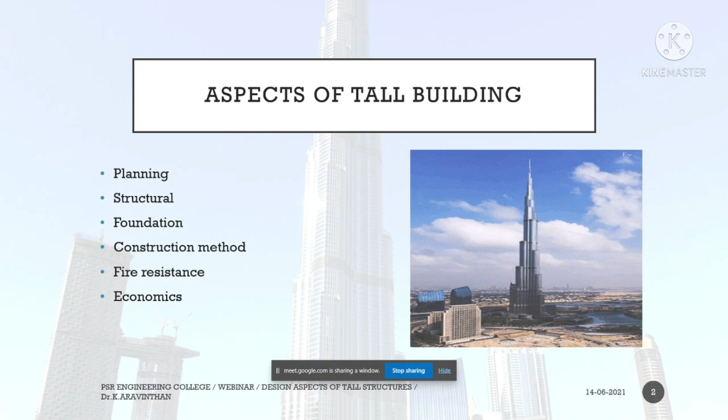The last thing is economics. Yes, it doesn't come under the part of civil engineering, it comes to the client side. And next, what is a tall building?

There is no uniform definition for tall buildings throughout the world. Tallness is a relative thing. In South India, structures around 15 to 20 stories are called tall structures because infrastructure development is increasing year by year. In other countries, buildings up to 100 stories are common, with 20 to 30 such structures, so the definition of a tall structure differs for different countries, and we have to follow their norms. So there is no uniform definition for a tall building; it is a relative matter.

It depends on the person and community, and the circumstance and consequence of perception of how you perceive a tall building. So it is a vague word which cannot be fit into a civil engineering term.

In civil engineering terms, a low rise building is 1 to 3 floors, lesser than 9 meters height. A multi-storied building is 4 to 6 floors, around 9 to 21 meters height. A middle rise building is 7 to 9 floors, a small high rise building is 10 to 16 floors, and a high rise building is 17 to 40 floors. These are the levels before a tall building. The highest high rise building is called ultra high rise building, which is more than 40 stories.

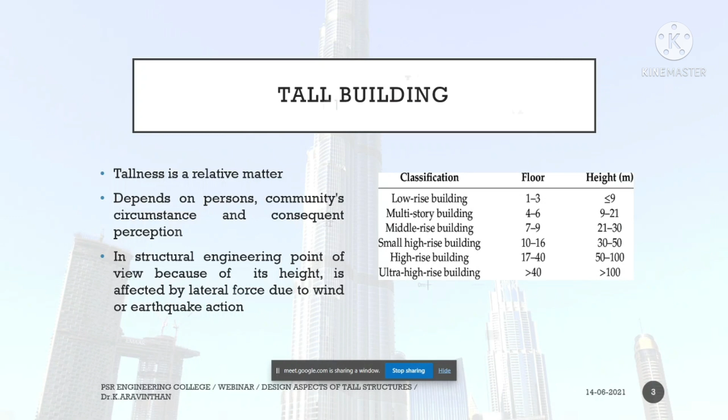These are the preliminary classifications up to a height of 100 meters. From the structural engineering point of view, because of its height, a tall structure is affected by lateral force due to wind or earthquake action. So if the construction is largely affected by these two phenomena, and if the lateral force is comparatively higher than the vertical force, then it can be said to be a tall structure.

There is the Council on Tall Buildings and Urban Habitat, an international association and organization particular to growing urbanization and tall structures. Throughout the world there are such associations, and in India we have CTBUH, which has several classifications and is interested in creating and developing skyscrapers. A building taller than 200 meters is called a skyscraper, and a super tall skyscraper is taller than 300 meters. A mega tall building is taller than 600 meters - Burj Khalifa is the only structure beyond the 600 meter level.

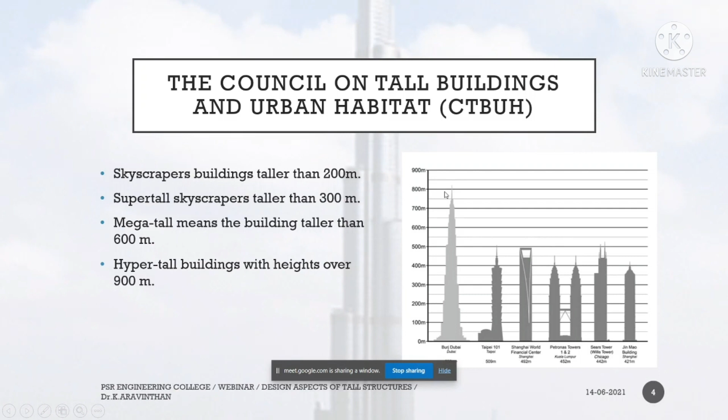You can see the picture here, it is nearly... Excuse me sir, slides are not moving, sir. See, is it visible now? Yes sir, now it's moving. Yes sir, okay.

So you can see around 800 meters of height, and the rest of the structures - the Taipei 101 tower is around 509 meters, and many hyper tall buildings under construction are around 900 meters. Still only one structure, having around 600 meters, is a mega tall structure.

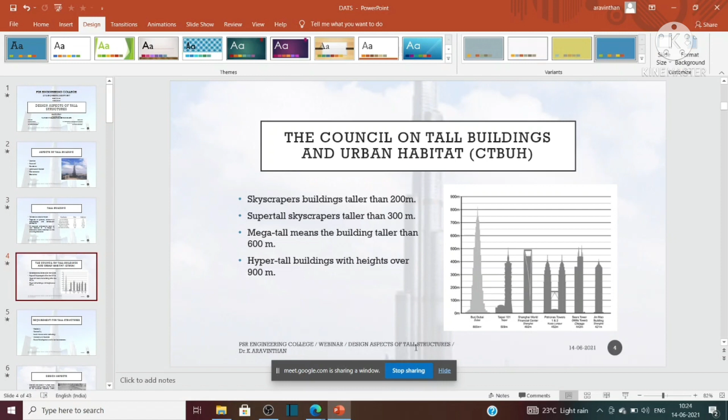These are the classifications under this. Sir, make it full screen please. Make it full screen, yeah. Is it visible now? No, sir, not visible. So I am sharing my entire screen, please confirm from that end so that it is visible or not. Yes yes sir, now it is visible. Okay, fine, thank you, yes okay sir.

The requirement for a tall structure - what is the demand? Why do you need a tall structure? Is there any demand for that? Is there any force behind that? Yes, if certain conditions are met below, you can go for a tall structure.

First one is feasibility, whether the tall structure is feasible for a government or for a country. A tall structure cannot be built by a common person, and it is for the common people, for everyone. The construction is not only for a single person. If a tall structure cannot be occupied by a single person, it should be a community oriented structure, and it will be a landmark.

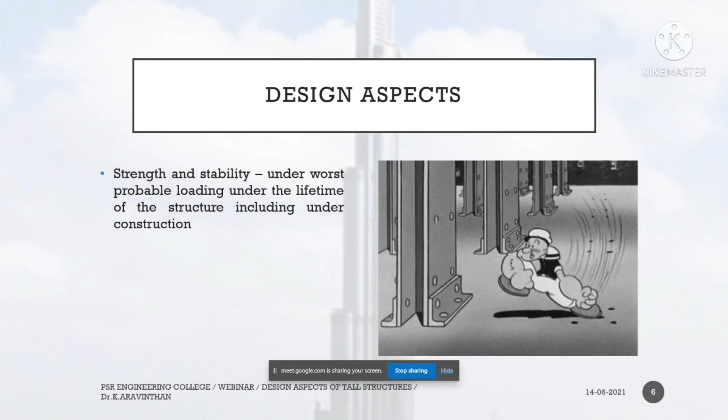From an academic perspective, we know the concept of how rigid frame structures are designed, how framed structures are designed - beam, column, foundation, slab, everything. We know the calculation of reinforcement, and we know how to construct and deal with all these things.

So what about the design aspect of tall structures, which are higher than 400 meters, 500 meters? Are the techniques we deal with in our subject enough, or is there any new technique or new principal phenomenon? This is the core of the subject today. Let us discuss this.

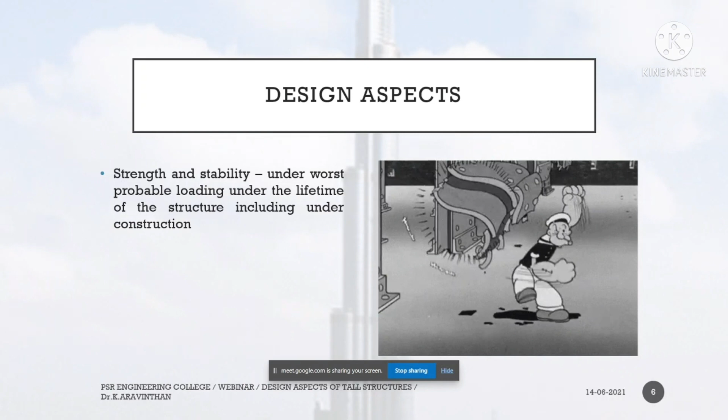The first aspect of design is strength and stability. You can see a picture here - I hope everyone remembers this Popeye cartoon, and if he has his spinach, he will be able to make anything and everything. You can see a steel structure being bent as simple as that. Only in cartoons can you see this.

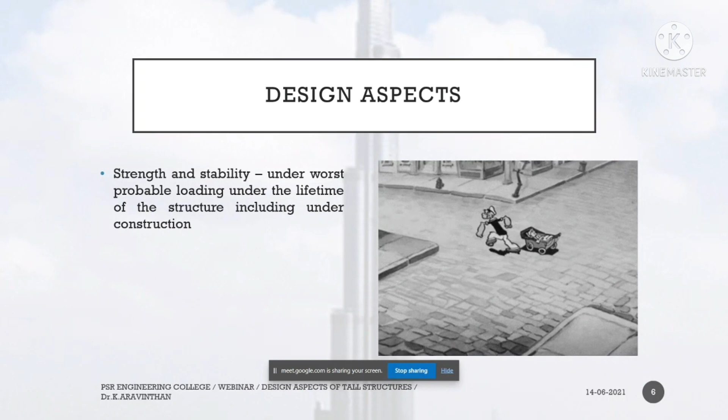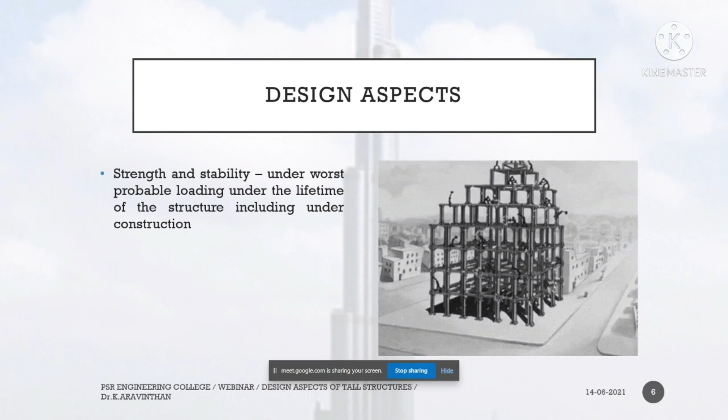You don't need any structure in real time to behave like this, under the worst probable loading, under the lifetime of the structure, including under construction. The requirement for stability is that whatever you design, say for a single story structure - for example a beam with a 10-meter span - if you make the reinforcement for the dead load and live load which is sufficient, even if you go for 100 stories or 200 stories, the principles are the same in case of strength and stability. The concept will not change.

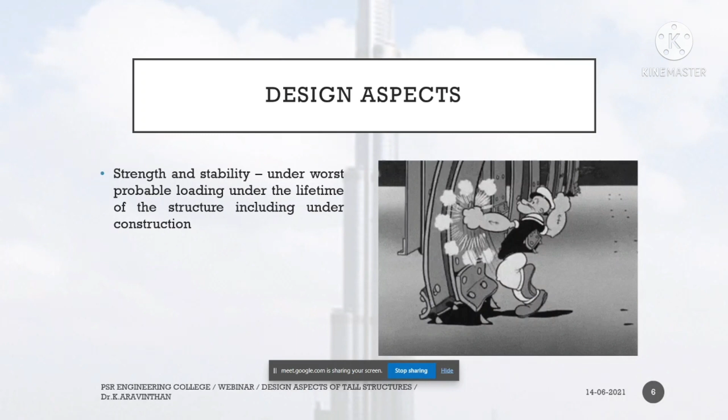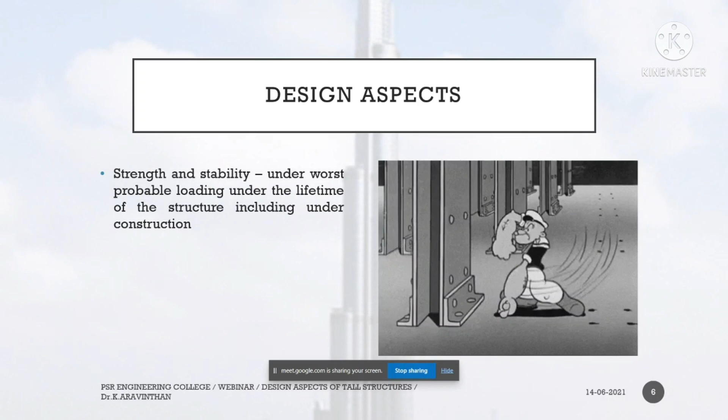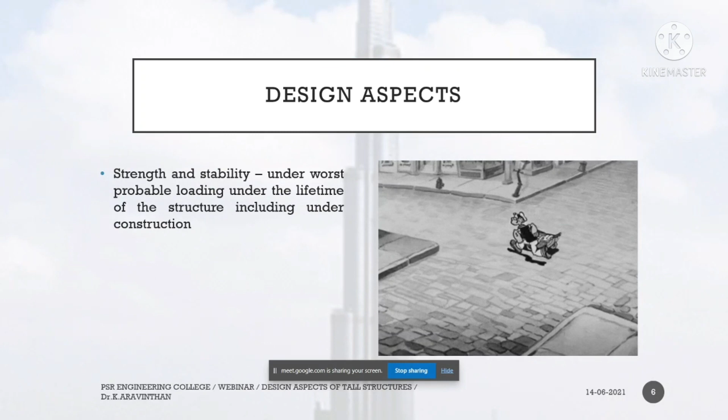There will be addition of loads apart from the dead load and live load - these will be dealt with next. In terms of stability, the reason I included the cartoon is that the structure is behaving like a rigid body deformation, with no foundation connection to it. If there is any force acting, it should not get deformed or damaged with a rigid body deformation.

Next thing is structural form. There are different types of structure. We have heard about two things which are framed structure and load bearing structure - these are the two things which are there in academics.

There are a number of other forms of structure, particularly for high rise, and up to 10-story structures which are designed for gravity load. The major load will be gravity, with any increase of member for wind load and permissible stress and load combination. So the increase of wind load will be lesser than the gravity load, in the sense lesser than 10%. For more than 10 stories, additional materials are required due to wind load.

So if you are a structural engineer designing a structure, you can see the gradual increase of material purely due to wind load and earthquake load. Both must be considered, and according to the zone and the level, these loads are differentiated and the materials are used accordingly.

If you go for a 10-meter span of a structure, say if a column is there, and you want to design a beam for 10 meters, you will need at least 0.6 to 0.9 meter depth of beam. For example, if you are going for a large opening, there is a higher demand of depth, and also a higher column size is required.

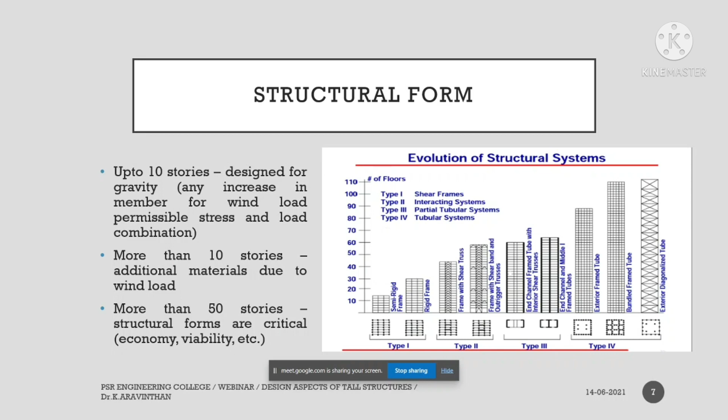Let us discuss this in detail. You know that rigid frame structures are connected between beam-column joints, and you can raise this structure up to 25 stories. Economically, you can use this rigid frame structure up to a size of 6 meter by 9 meter bay, and up to this bay you can rise up to 25 stories.

The advantage of going for a rigid frame structure is you can have an open rectangular arrangement. The rectangle shape is the most often used shape by all services. So if you have a rectangular plan, you can easily occupy all the requirements for people, and a rectangle shape has a science behind it: space is represented by the rectangular shape and time is represented by the circular shape.

We all exist in space, so whatever is there in a rectangular shape will be easily occupied by people or anyone. This is the scientific phenomenon, and rigid frame structures are primarily for the rectangular shape, depending on the beam and column connection with its stiffness.

So the stiffness of the structure - there is a concept called lateral drift. If you keep increasing your structure, what happens? There will be drift in the structure due to lateral load. It will be around 1 by 100 to 1 by 1000. At this range, what is this 1 by 100?

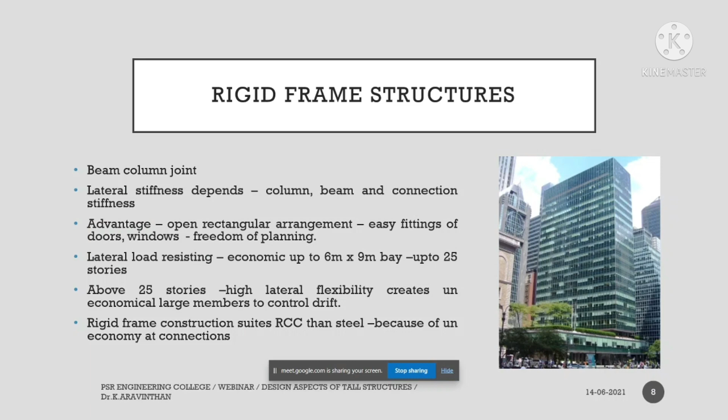Then infill frames. In India, most places follow infill frames. Whenever we go for a rigid frame, the partition between two walls is decided by this brick wall, or it may be other walls made of blocks added between the structure, and the outer walls are filled up with these members. Up to 30-story height, these infill frames are economical and efficient.

The term efficient has many parameters, which I will discuss further. Infill behaves as a strut diagonal to the brace of the frame. You can see a brick wall here, similar to the braces used in steel structures. Whenever you find braces in a steel structure, like in a railway station, during the passage, in the vertical lift, you can observe the diagonals, and the bracings are supported there.

So in case of RCC structure, these bracings can be equivalent to the infills. This is the most economic way of strengthening and stiffening the structure. Why? Because you can use the structure as load bearing. Even though it is a non load bearing member, it can take some load, transfer some load, and distribute some load. Distribution is very important here, and even after distributing, it still acts as a partition between two people.

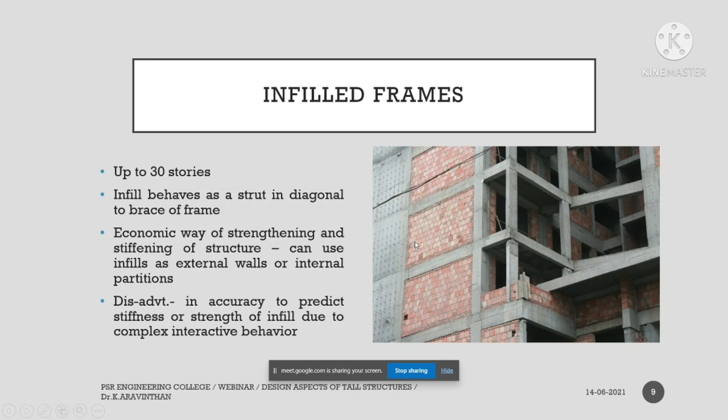Next thing is shear wall structure. These kinds of structures can go up to 35 stories, and you can see the number of stories go beyond that. Why I mention this is you have both economy and efficiency. Up to this number of stories, you will be having both in parallel.

Concrete vertical walls serve architecturally - you can see the picture here. The shear walls give architectural appearance also. If there is a planar element in your structure, you can observe the aesthetic view. So shear walls are appreciated by architectural engineers. In the external supports, whatever you are using, it gives a good look.

So, use of partition to transfer gravity and lateral loads. The shear walls have two components: they transfer the gravity loads, and they are primarily used for carrying the lateral load. You can see the shear walls running from the bottom to the top of the structure.

There should be no discontinuity in construction of the shear wall, and very high in-plane stiffness suits the tall building. If you consider any plane in this structure, you can see the shear wall in both planes, x and y direction, either positive or negative. You can see the symmetry and the distribution of force evenly, so it has high in-plane stiffness.

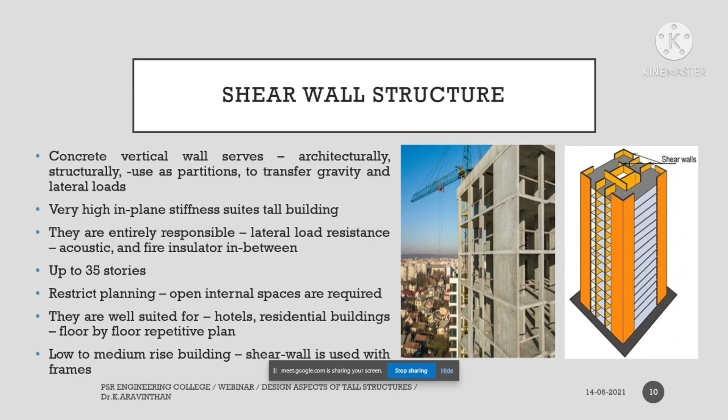This restricts planning, and open internal space is required. If you introduce more shear walls, there is a lacking of windows, so you cannot place a window at a particular story, for example in a residential tall structure. Shear walls are well suited for hotels and residential buildings with floor by floor repetitive plans. These are ideally suited for residential buildings, and hotels are built similarly, with common functions available throughout the vertical limit. For low to medium rise buildings, shear walls are used with frames.

This is a coupled shear wall. You can see a window here. Shear walls are not purely constructed using a single wall; you can use this coupled shear wall. This is a coupling beam, connecting both shear walls. So you can have windows and openings here, in a wall-frame structure.

This is the next level; up to 40 to 60 stories you can go for a wall-frame structure. What do you mean by that? Wall here refers to the shear wall mentioned earlier. The shear walls transfer the lateral loads, and the rigid frame transfers the gravity loads. Shear can be turned approximately uniform throughout the structure, allowing a repetitive plan.

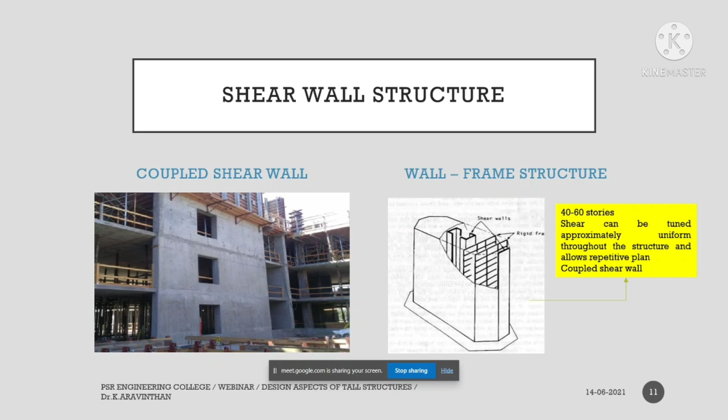The purpose of the shear wall is to transfer the vertical load evenly. Without the shear wall, the load is not transferred evenly, so we cannot resist the lateral force. What we can do instead is distribute all the forces to each and every member at the respective floor.

The next form of structure is the tubular structure. This is the World Trade Center, an example of a tubular structure, used beyond a certain limit. These are the peculiar things in a tubular structure: all the column spacing will be nearly 2 to 4 meters, a very close spacing column around the structure. The outer part of the structure will be having nearly 8 or 9 feet, and at this close distance center to center, you will hardly have an opening.

The inner column differs from the outer column. The inner column is placed primarily to transfer the vertical or gravity load, while the outer column transfers the lateral force, and the in-between in-plane structure, which are beams, is used to distribute the forces evenly between the inner and outer columns.

With this concept you can go up to 40 to 100 stories, and these are most efficient for a rectangular plan. If your plan is rectangular, you can straight away go ahead with the tubular structure, which can occasionally be circular or triangular, though those are very rare. They carry the lateral loads, forming a very stiff moment-resisting tubular frame around the perimeter of the building. The flange column is less stressed than the corner column.

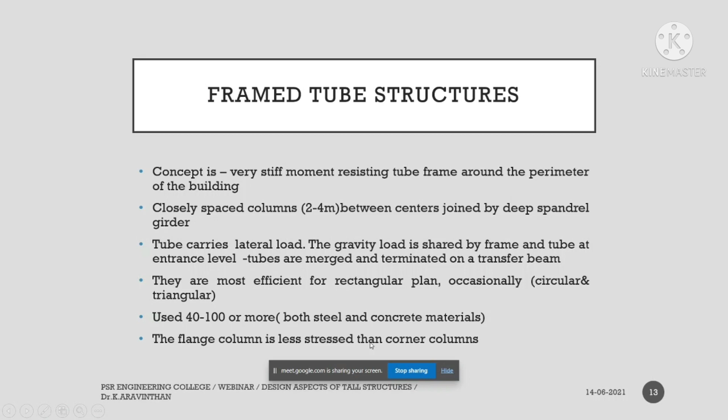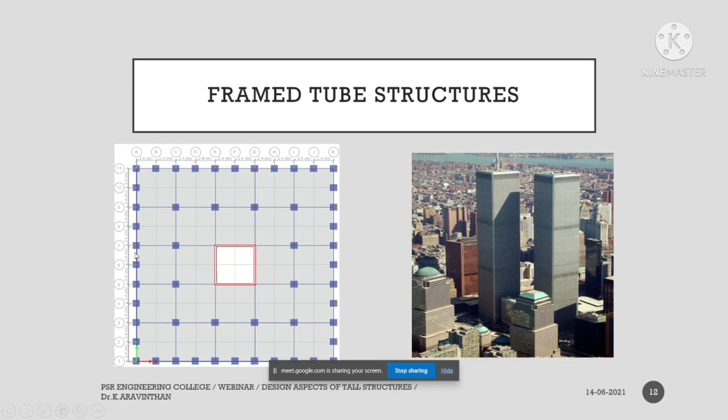This is the disadvantage of having the tubular frame structure. See the corner columns, what you observe here, so the corner columns have a high amount of stress when you compare to the in between columns if you have. So this is the disadvantage of having the tubular structure, which is primarily frame tube.

Next thing is hull core structure. What do you mean by hull core is, the center part is known as the core and the outer part is known as the hull, that is the outer tube. So you can have the shear wall inside in a tubular structure. If you are having the core, inside the core you will be having shear walls, and the outer part of the structure will be having the tubular structure, which will be having closely spaced columns.

If you are using this kind of structure, you can go for the next level of height. So the outer and inner tubes are present. Core is used as an internal elevator. Constructing the elevator is a conscious thing where small deflection does make a difference, and these parts you can use the core as the elevator, and for other services you can use it for pipelines and air conditioning, ventilation, everything. So you use those cores for that purpose.

And the steel structure for core, if you are constructing the structure by steel, you can use braced frame when you are constructing the structure by steel, and if you are constructing the whole structure by using concrete, you can use shear walls.

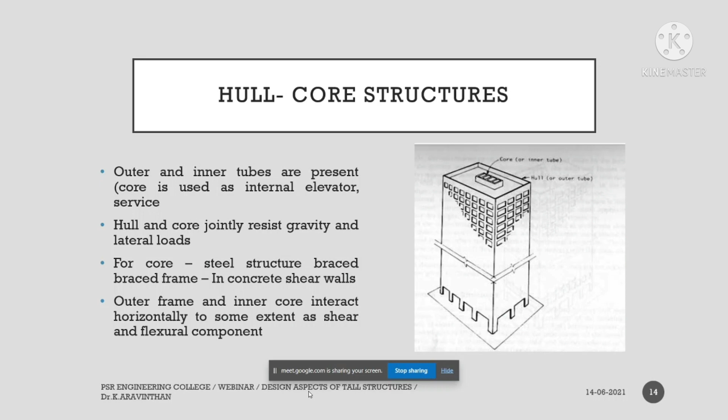Next thing is bundled tubes. This is another level. The Sears Tower in Chicago is being constructed by using the concept called bundled tubes, and you will be having a number of bundles in a separate frame. You can observe here, these are the number of bundles: 1, 2, 3, 4, 5, 6, 7.

At the other part you can see 2 number of bundles, so there will be 9 number of bundles. What do you mean by bundles is, each and every plan has a tubular structure. Multiple tubular structures being connected is known as bundled tubes. So 4 parallel rigid steel frames in orthogonal direction, and in this structure you can see 9 number of bundles.

I will share you the plan, and the frames in the lateral direction of the loading serve as the web of a cantilever, for the normal frames acting in the flange. This is the point which is getting the advantage, so these can serve as the normal frames.

The load which is coming in the lesser bundle, these bundles carry the remaining part of the load, and the next level will be carried into the next bundle. So you can see the level of bundles, and each and every bundle carries the lateral force. At the top of the story you can see that, while analyzing, there will be less amount of lateral force.

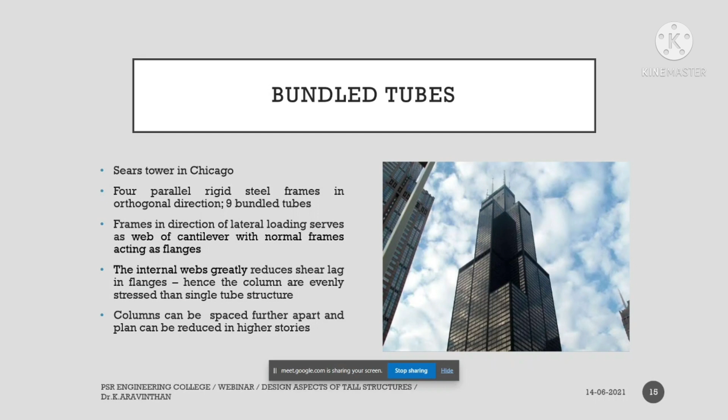This is the picture of the structure which is there in Sears, and you can see the number of bundles here, these are the 9 number of plan. So 9 number of bundles are connected from story 1 to 50, and if you go beyond 51 to 66 you can see 2 tubes are omitted and the rest of the tubes are increased, and up to 67 to 90 the remaining two tubes vanish, and at the top of the structure, from 91 to 110, you can see only 2 tubes going to the top of the structure.

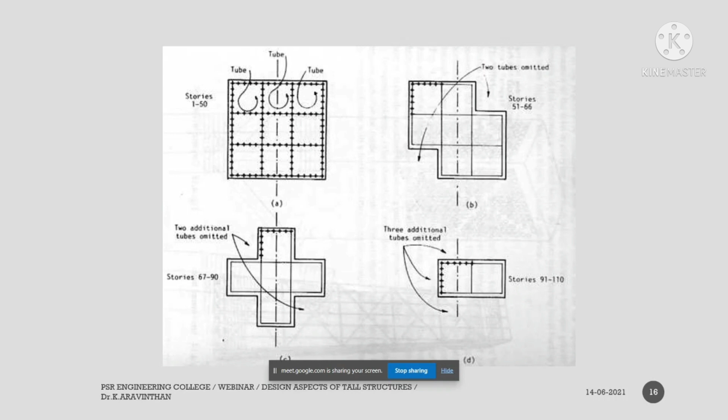The concept here is the bending stresses are very less due to the lateral force at the top of the structure, so if you go to the bottom level there will be maximum flexural stress, and in order to take that, this kind of plan is provided for the structure. Next thing is diagonal brace tubes.

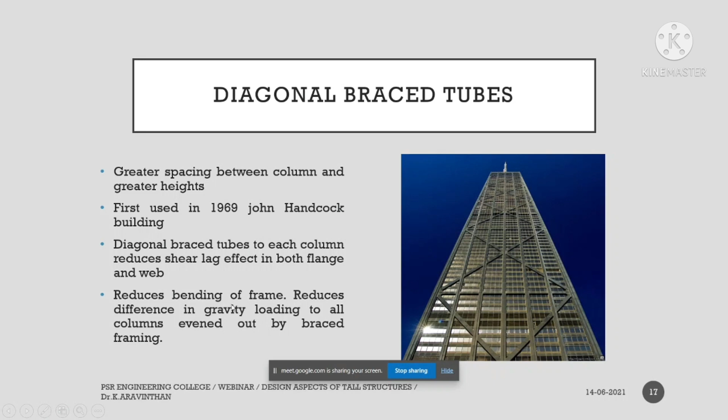The example of this structure is the Hancock building, built in 1969. Here greater spacing between columns and greater heights are available. In a tubular structure, the column distance is normally 2 to 4 meters, but it can be increased because you are increasing lateral stability by using stiffeners. Diagonal stiffeners are used to carry the lateral loads, hence you can increase the column spacing. This is one advantage, and it also reduces the shear lag effect in both flange and web.

Let us go to the next level of structure, the outriggered braced structure. This form of structure can be used for 40 to 70 story heights. There is a core structure internally with a shear wall, and on the outer side you have a belt built using trusses, which are connected with the inner tube. These belts are constructed up to 4 or 5 levels, which is economical, and multi-level outriggers are more effective at resisting moment than a single outrigger.

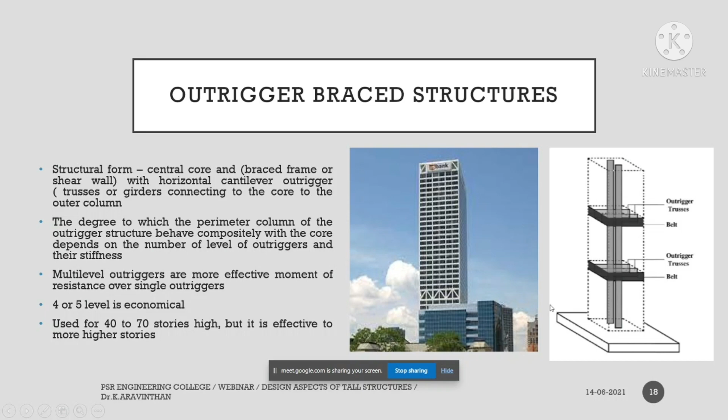You can see two outriggers here, constructed using steel structures. They carry the lateral force and transfer it through the internal core, which acts as a force-transferring mechanism. The outer column transfers force through the beam to the internal core, and the degree to which the perimeter columns and outrigger behave compositely with the core depends on the number of outrigger levels and their stiffness. If you keep increasing the outriggers, you get greater stiffness.

Next is the suspended structure. These structures are very aesthetic and are primarily constructed for aesthetic purposes only, mainly for architectural reasons. They are very pleasing in appearance, but from a civil engineering perspective, they consist of a central core, and you may wonder how the structure is actually connected.

You have a central core which transfers all the loads, both gravity and lateral loads, carrying the hanging loads. They are connected by beams, and the beam loads are connected into the frame and linked to the inner core.

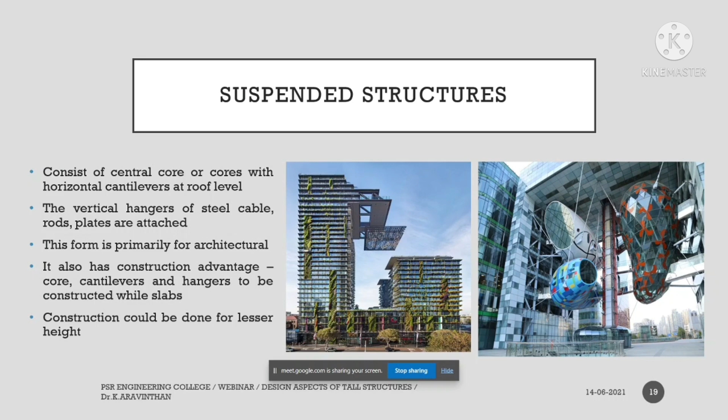Next are hybrid structures. The example of a hybrid structure is the Burj Khalifa. What does hybrid mean in this context? It means the number of structural forms used together. You can have a rigid frame structure, shear wall, a core of shear walls, and you can use outriggers. Each of these is a different type of structural form.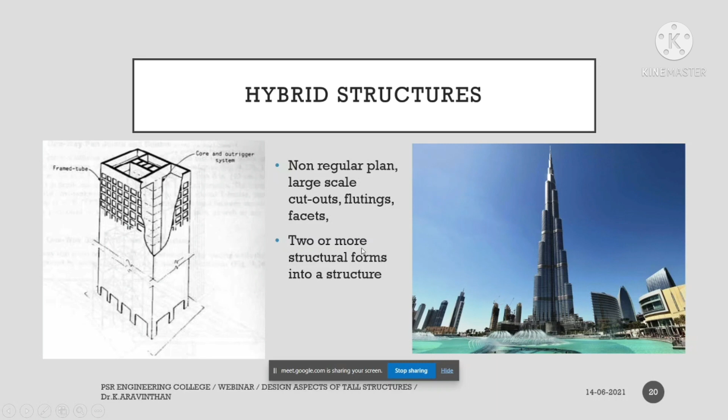Non-regular plans with large-scale cutouts are constructed using hybrid structures. When you use two or more structural forms, you can have large cutouts, large openings, and flutings, as well as curved shapes in the outer rings and facets. These are the advantages of going for a hybrid structure.

The last type is the space structure, which I mentioned earlier. The Sardar Vallabhbhai Patel statue is constructed using the space structure.

So the structure is being constructed internally to take all the loads by using space frames. You can see three-dimensional members being used in order to take the load.

After construction and after the facade members are installed, you have a different structure. The Hong Kong Bank of China building is constructed using this space frame structure, and structurally you can see an awkward kind of arrangement.

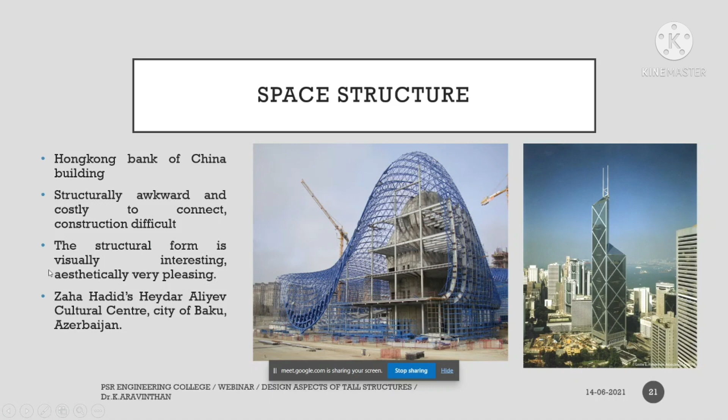This is an unfamiliar thing to see, but after installation of all the elements, you can observe a very good structure, a different level of structure. This is used primarily for architectural purpose, and the structural form is visually interesting and aesthetically very pleasing.

So now we have discussed the number of forms. Now let us go into the technical detail.

These are the surface level information which I gave to you, so you know what we are discussing and what we are designing. So before going into the criteria of design, a designer should know all the aspects in order to start the design.

He should know the planning aspect, architecturally, which I mentioned before the session started. Planning is the first aspect. The structural form will help you design the plan. According to the plan given by the architect, the structural engineers have to work, and after getting the plan, you can decide your structural form.

What kind of structural form you can go for, and what are the next level of things which have to be taken care of before the design.

When coming into the design criteria, the service intended occupancy is the first design criteria required. What is the service you are going to give inside? Either it is a theater, a public mall, a shopping center, or an amusement park. Everything can be fitted into a tall structure.

Whatever you can see in a horizontal plane, in land, you can fit everything into your tall structures. This is what is happening in all the structures being built. So what service you are going to give has to be taken care of in the first part.

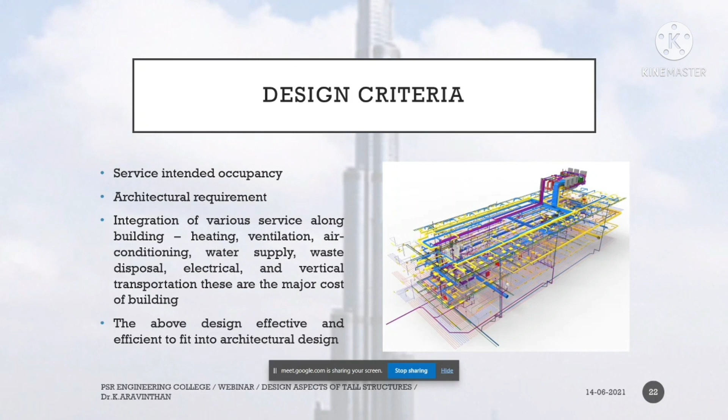So why is a particular structure given to two or more designers? If you are going for a structure with more than 10 to 12 floors nowadays, they go for at least 2 or 3 designers. So the clients meet 2 or 3 designers.

Why? Because the solution given by each designer is different. For the same structure, you might have different solutions, and different forms of structure can fit your service. What is the efficient number of services depends on the experience of the designer handling it.

And that is why they are going for 2 or 3 iterations of the design, and finally they will be meeting with the client, and the client will have the last word, either to go with which design or which condition. So everybody will help regarding those perspectives.

Okay, coming to the point of loading, the first point which has to be considered in design is gravity loading. That is gravity load, which is either dead load or live load. Both have to be considered.

And the second thing is lateral load. So these are the two loads acting on this tall structure, and the lateral loads are wind and earthquake. One is a transient effect and another is a permanent effect. So you might have a permanent wind flow throughout the year, a constant wind force on a structure, while a transient force like earthquake you might face every decade.

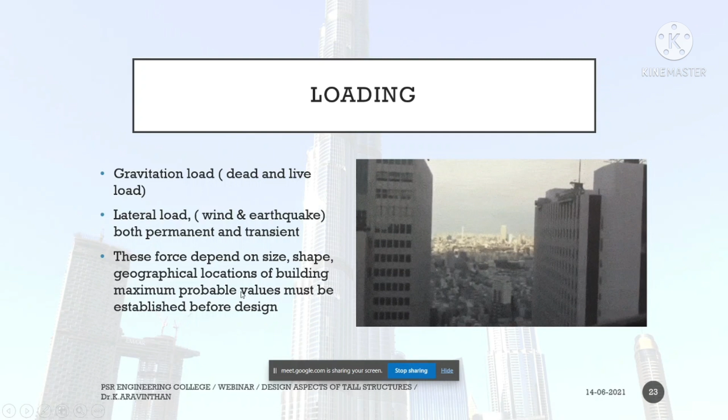And the next thing is stability. If you are speaking about the stability of the structure, you should consider rigid body deformation. The principle is that your whole tall structure should be considered as a rigid body, and you should check for rigid body deformation. It should not get toppled, it should not get twisted.

So why we are considering stability is that this is a structure and it should abide by Newton's law, and you should check regarding overturning, twisting and tilting. These are the checks to be done before proceeding with detailing, and check the basic equilibrium equation under lateral force that can cause the building to topple or overturn, with an acceptable factor of safety.

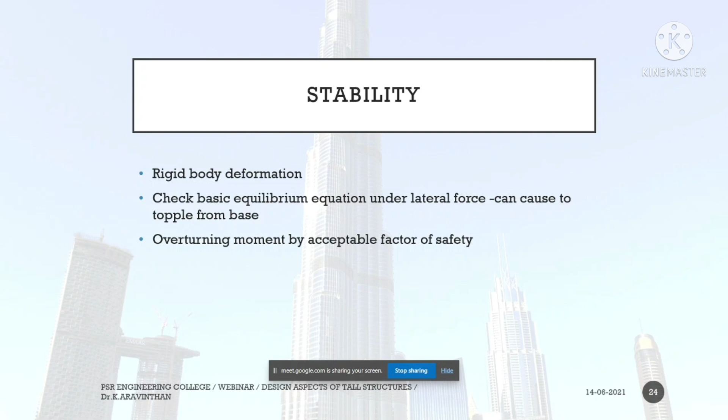So the factor of safety is given by each and every national code, which has to be followed, and according to that national code it has to be designed for stability.

And I have mentioned the stiffness and drift limitations. The two things mentioned: in strength wise we have discussed, and in stiffness wise the drift is the major parameter. So this is what I mentioned earlier.

So 0.1 to 0.5 meter of drift is acceptable for a 100 meter structure. So there is a drift limitation, around 1 by 200 to 1 by 1000. Here it is mentioned as 1 by 200 to 1 by 1000, which is 0.001 to 0.005. There is no widely accepted value for this limitation, so the drift limitation is given by each national code, which we have to abide by.

Also, for one story, the structure can drift laterally 3 to 15 mm, and that is normal. For a 100 meter structure, 0.1 to 0.5 meter of drift is normal and acceptable. When considering the stiffness point of view, you have to make sure this is the amount of drift which can happen, and more than that is not acceptable, so you have to provide stiffness for that.

How we can make stiffness: we can introduce shear walls, we can introduce diagonal members, and bracings we can provide. Yes, so the drift also causes discomfort to the occupants, so there is a discomfort limit which we will discuss.

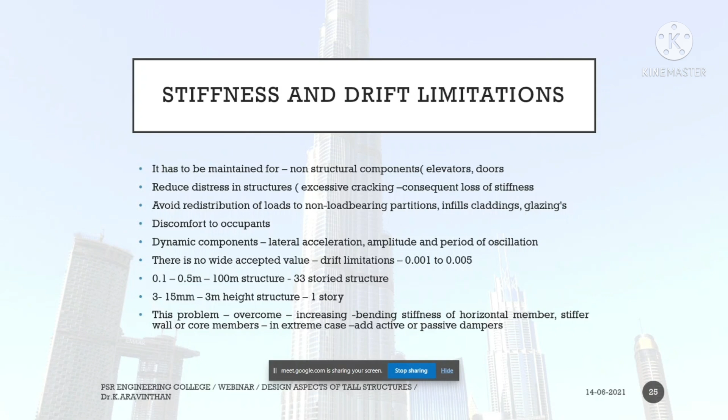And the horizontal members are very much important in carrying the horizontal force, that is the stiffness. You can go for a stiffened wall, that is a shear wall, or you can go for a core member. In extreme cases, you can use active or passive dampers. These come under isolation of a structure, and you can use either base isolation or partial isolation, using active and passive dampers to reduce the stiffness and deflection.

Next is wind load. The primary loads which I have discussed are wind and earthquake. To identify the wind effects, a number of software are available, and you can use ANSYS. So we can get the wind force, and identify the place where we have the maximum force and intensity through analytical observations.

And also you can do a wind tunnel test, where the static and dynamic forces can also be considered. As per UBC, if the height is 123 meters, that is 400 feet, or the height is greater than 5 times the width, these are the two conditions. If a structure is constructed to 123 meters height, or has height more than 5 times the width, that structure is sensitive to high wind excitation. This is a thumb rule for how much you have to concentrate on wind force, and modeling in a wind tunnel can be used.

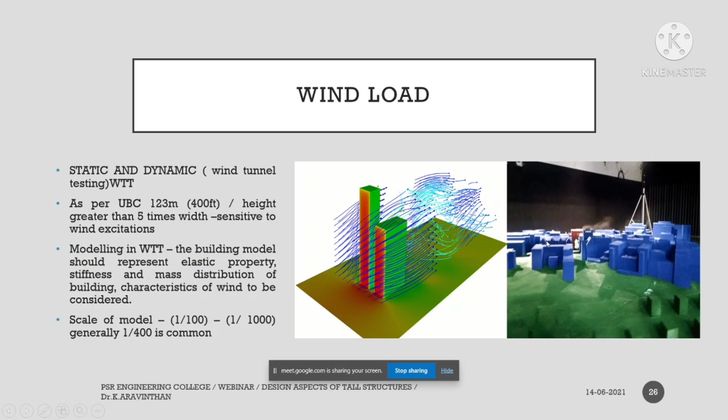And the scale of the model for a wind tunnel test can go from 1 by 100th of the size to 1 by 1000th of the size. Generally 1 by 400 is a common size, where you make your structure into a small model and test it using the wind tunnel test in order to get the approximation of load and carry out an analysis.

So you can see the deflection of the vertical structure due to the earthquake. The second part of the lateral force is the earthquake load.

The philosophy here is: if a minor earthquake occurs, your tall structure should not get any damage, for both load bearing and non-load bearing structure. If the earthquake is moderate, you cannot have structural damage and non-structural component damage can occur, but you cannot have structural damage beyond that. And if there is a severe earthquake, you can have structural damage, but the structure should not collapse, and the non-structural member can be damaged. During this case, your structure should be stable, whatever might be the earthquake. This is the design philosophy you have to take, and for this, certain concepts have to be used.

I will discuss this. If the vertical mass distribution is significantly irregular, that's one case, and there is large floor to floor variation of internal configuration, that's the second case, then modal analysis is required. In earthquake design, if you are following earthquake criteria and codes, they will say that your structure should have a regular plan, either rectangular or otherwise regular, and it should have symmetry. These are the things followed for an earthquake resistant structure.

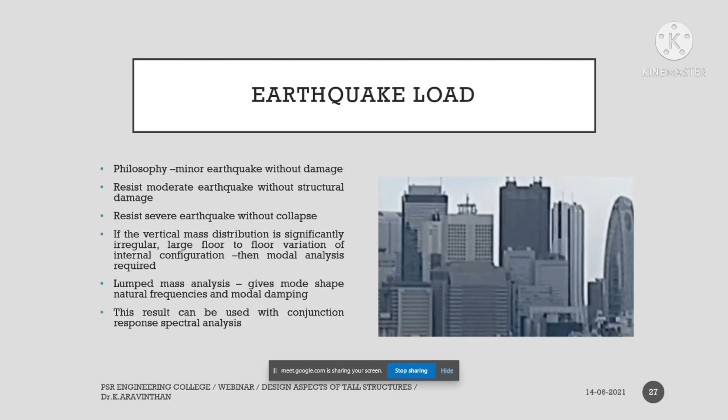The results can be used in conjunction with response spectral analysis. The better and best way is to use response spectrum analysis for the dynamic character of earthquake load. You can use this concept along with the modal analysis. Both things have to be used in parallel.

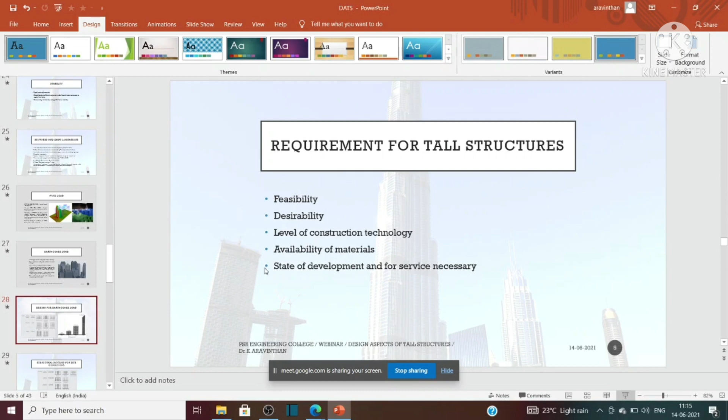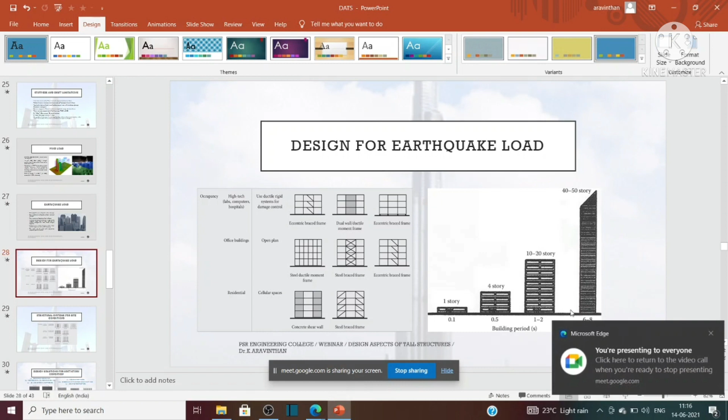Okay, so do we have proper time? Do we have enough time? I am crossing the limit, so I have some more points to discuss. Nearly I have 20 more slides. Are the participants comfortable? Yes sir, the design is going very good, the design engineers are interested in whatever I am going to discuss now. Mostly practitioners, research scholars and academic persons will be interested, and the students might not be interested. So from a technical point of view, since we have 20 more slides and I am crossing the limit, I wanted to check if everyone is comfortable or not. Yes sir, please continue, very informative. Okay, Manoj, I will be proceeding, let me take some more time. Okay sir, no problem sir.

See, a lesser time period will have a number of cycles in a fraction of a second. So if you have a fundamental period of say 0.1 seconds, you might be having 10 oscillations. So if you have 6 or 8 seconds, you might have a different fundamental natural period, and for 6 seconds or 8 seconds you might have just one oscillation. So this is the fundamental period of a building.

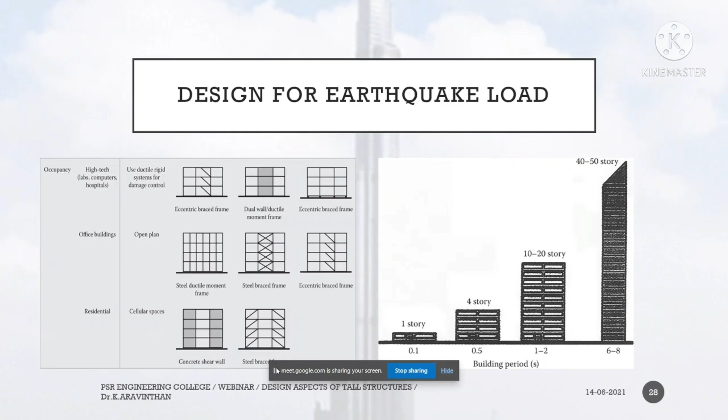If you are going for a residential structure, use a cellular frame, that is concrete shear wall. So for residential purpose, instead of going for steel structural design, you can go for concrete structural design along with shear walls. These are the points useful when designing a structure.

For the structural system according to site condition, we have three types of site condition from an earthquake perspective. If your site is very soft with a long period, you can use a rigid building with a short period. Your structure should be very rigid and you should increase the stiffness by increasing the shear wall, either using shear wall or steel brace or eccentric brace.

If your site is very hard, say for example Bangalore, which majorly has hard sites, there is less probability of the phenomena of earthquake. If you compare with Chennai, the soil there is very soft. These are two areas in South India with very different soil conditions: soft soil in Chennai, and hard soil in Bangalore.

You can use a flexible building with a longer period, so a ductile moment resisting frame is enough, and also you can use a base isolation system for hard sites. For poor soil condition with pile support, you can use a lightweight rigid building.

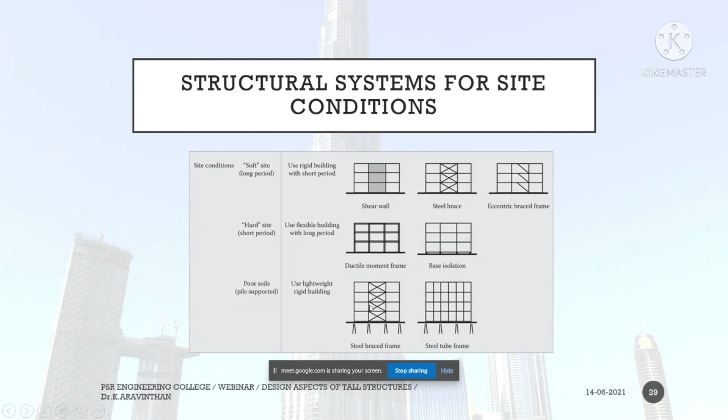This is the condition if you are designing for areas such as the seashore around Dubai and the Gulf countries. You will majorly be having this kind of structure, needing pile support. Without pile foundation it is not possible to construct tall structures, and you need steel dampers and lightweight structures.

So these are some design solutions for soft story. I explained that tubular structures are very useful for going beyond 100 stories. If you are going for 1 or 2 meter spacing of a column, can you imagine where the vertical openings and windows would be placed?

What happens at the entrance? At the top floor it is okay, but what about the entrance? There you would only have 1 meter spacing for that tall a story, which is not appreciable. In these kinds of conditions, what they majorly go for is a soft story.

You can see a soft story condition here. The bottom floor has lesser stiffness compared to the top floor, as everyone knows, and due to this stiffness variation you will face the soft story problem, causing the building to topple.

Also, due to discontinuity of the gravity load, the gravity is not flowing in a vertical path. In earthquake analysis, the guideline states that all loads have to follow a gravity path; if not, the structure will be subjected to turning or twisting, eccentric forces will arise, and toppling of the structure is found. You can see this kind of thing is familiar.

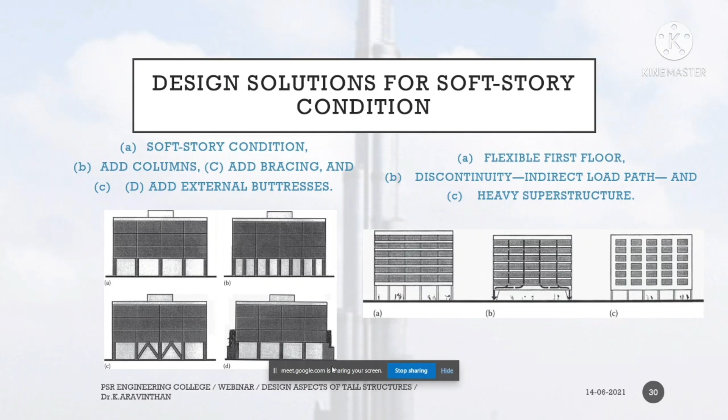So in that floating beam, the column will be placed, and the stiffness is very important there. You can calculate by using software, and you should make sure that the flow of force will be linear and there will be no shear deformation. These are the other things you can add: you can add columns, or bracings, or use buttresses. These are the buttresses used in outer frames, which help the structure.

The next thing is damping ratio. It is a research phenomenon. We don't have a particular formula to find the dampness for a structure, say a 3-story or 4-story structure. If you want to analyze dynamically, you need to get the damping of the structure and the damping ratio required to satisfy the fundamental equilibrium for dynamic excitation. If your building is under dynamic force, that is earthquake and wind, it should have damping, and you need to arrive at the damping in order to make your structure stable. Several designers face trouble arriving at the damping ratio.

So there are some guidelines which have been arrived at, and through many research articles you can find the damping ratio for a particular structure. But if you are going for a tall structure, they are unique, and you have to identify your own structural dampness. The structural dampness also depends on each and every structure - it depends on the structural form, the material you are using, everything.

So this damping ratio will give you certain highlights. If you are going for an RCC core, in a preliminary case of design, these values will be very much useful for preliminary analysis, and in exact analysis you can find the exact damping ratio for your structure. Why damping is very important is, in order to take wind load and earthquake load, damping is a phenomenon which helps the structure, helps the engineer, helps people reduce your structural response. It reduces the lateral drift.

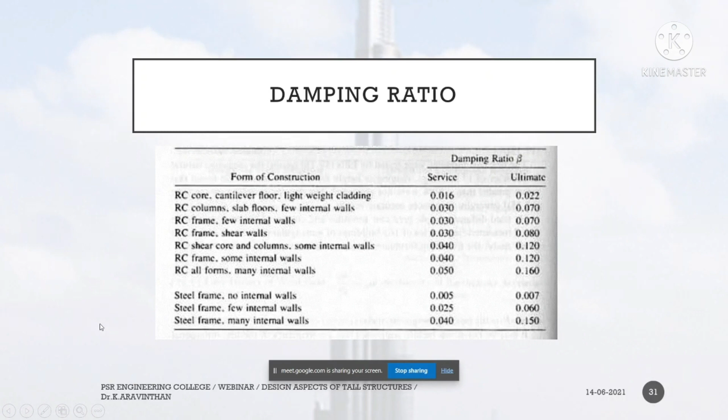In case of earthquake, zone is very important - in which zone you are constructing. Either if you are constructing in a Himachal-type place, or in zones of transition of tectonic plates, they are very important. That is why classification of zone is important in earthquake, and climate is important in wind. Then the second thing is exposure - either you are building in a terrain or local obstruction is there. Also for earthquake, local geological features are very much important, about the soil.

So these two parameters are about the soil, and you can use time history analysis for wind as well. Time history analysis is frequently used for earthquake, and even for wind analysis you can use time histories. We have different time histories of storms and hurricanes, and you can use those for your structure in design. Also, the best method for going to an earthquake-resistant structure is time history analysis, and you can use those time histories to analyze.

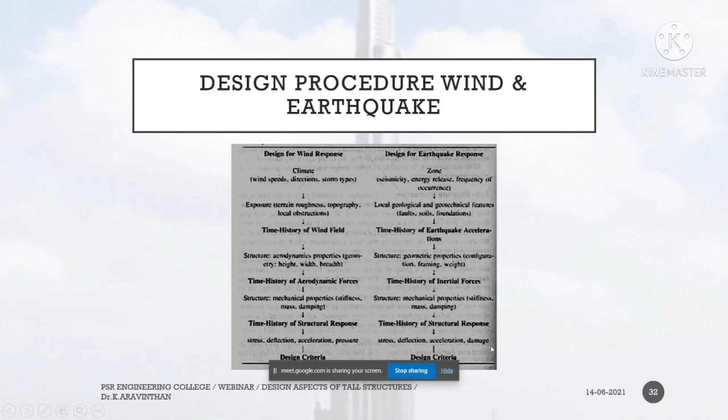Time history analysis uses stress, deflection, acceleration and pressure as parameters for wind analysis. In earthquake analysis, it's stress, deflection, acceleration and damage. So the only thing that varies is pressure. For pressure, you identify the wind force, and for damage, you analyze using the earthquake.

Next, I'll discuss the human comfort criteria. There is a rough guideline according to the time period of the structure, in order to identify different comfort levels across different time frames.

So if you get the fundamental time period of your overall structure, you can identify the human comfort criteria. By getting the analysis result, you obtain the time period, and from the time period you analyze the human comfort criteria.

These motions have a psychological effect. If it is not under the limits, the building will be unrented, so you are not going to be paid.

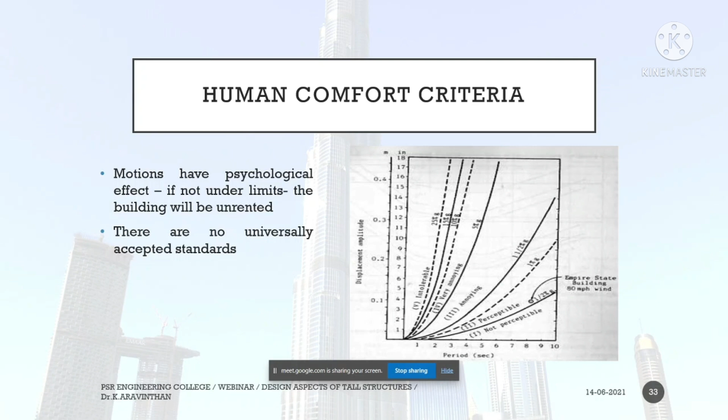After the analysis of earthquake and wind, you get the floor-wise acceleration. If it is greater than 0.85 meter per second squared, objects begin to fall and people may get injured. Around 0.4 to 0.5, people strongly perceive motion, find it difficult to walk naturally, and standing people may lose balance.

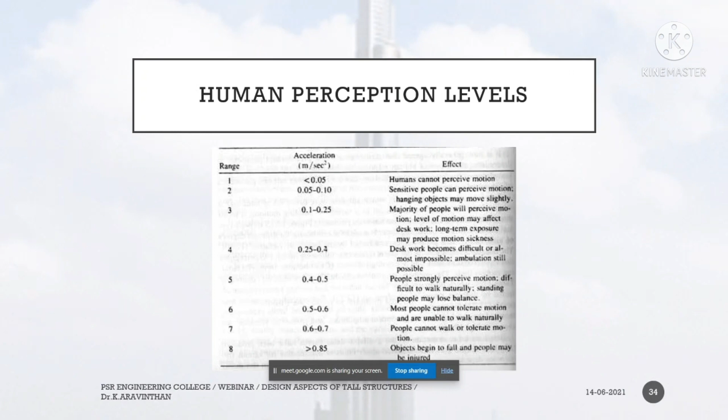These levels give an approximation. While designing, if your floor response falls in this level, you can straight away get the perception limit of humans and make the redesign accordingly.

Next is the concept of creep, shrinkage and temperature effect. Creep and temperature are major factors not present in initial levels, but at around 10 to 50 years, after 50 years, creep and temperature effects become very major compared to the gravity load.

In the upper region of a concrete structure, creep and shrinkage are sufficient to cause distress to non-structural components. The factors influencing creep and shrinkage are the volume-to-surface ratio and the amount of reinforcement.

If the amount of reinforcement is increased, the temperature effects show minimal deviation. This is because concrete and steel are both used, and for higher floors, the volume of concrete increases, making temperature changes very drastic.

This affects non-structural components like glazings and partition walls. As far as possible, distribute the structural members and loads evenly.

In partially or fully exposed exterior columns, a significant temperature difference is observed. This is why tall structures use glazings - to protect the structure and reduce its temperature difference through external glazing.

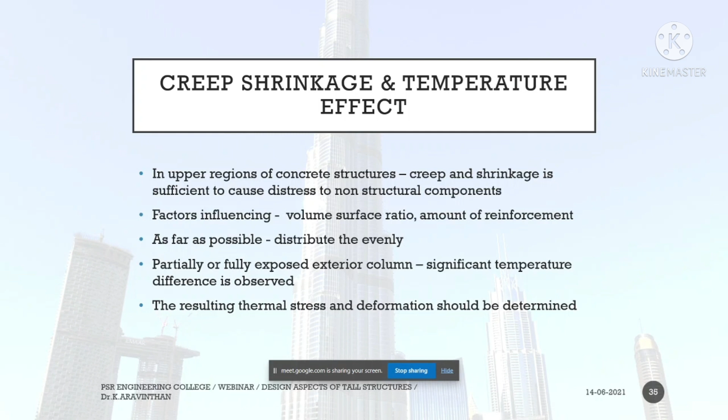Internal walls near the center of the structure have a lesser temperature variation, with differences of up to 10 degrees, or 15 to 20 degrees depending on location. If the structure is fully closed, this temperature difference can cause distress, which must be accounted for.

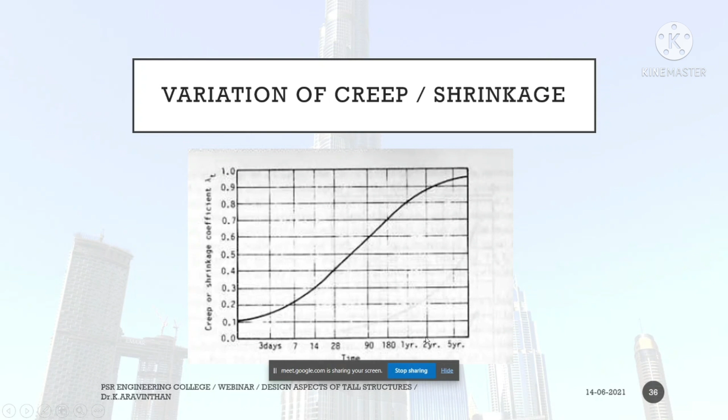This graph shows the shrinkage and creep coefficient. After 5 years, the coefficient that was earlier 0.1 during construction increases to 0.9. This must be identified and accounted for in tall structures.

The next topic is fire. When discussing fire, the quantity and nature of combustible materials present must be considered.

Number of materials will be used in your structure - not only concrete, but also steel and other acoustic materials, and service-oriented materials for air conditioning, water supply, and sewage. Different materials have different material properties, different combustible properties, and different extents of ventilation. These are the things which has to be taken care of in terms of fire.

The temperature at various surfaces has to be determined from the gas temperature curve. Using this curve, you get the temperature of various surfaces exposed to fire, and it is possible to estimate the heat flow through the insulation and structural members, and measure the amount of insulation required. Properties such as elastic modulus and strength decrease with increase in temperature.

For example, mild steel with a strength of 250 Newton per mm square reduces to about 25 Newton per mm square at 700 degree centigrade - nearly 10 to 20 percent of the yield stress of mild steel.

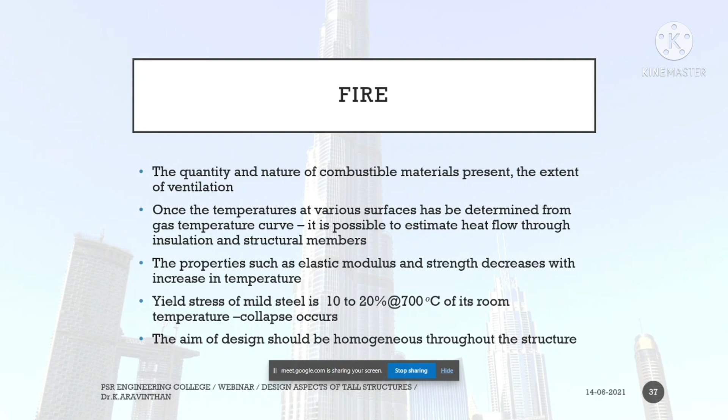So the fire degrades your structure - yes, the fire degrades the strength of the structure, hence collapse occurs. In the twin towers also, the fire degraded the structural strength, hence the collapse occurred. The aim of your design should be homogeneous throughout the structure in terms of combustibility.

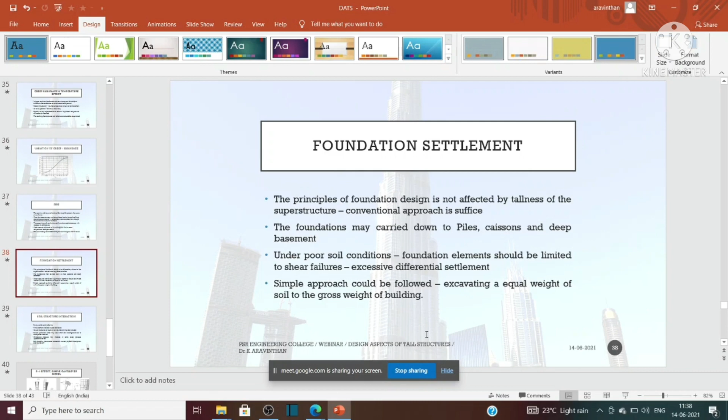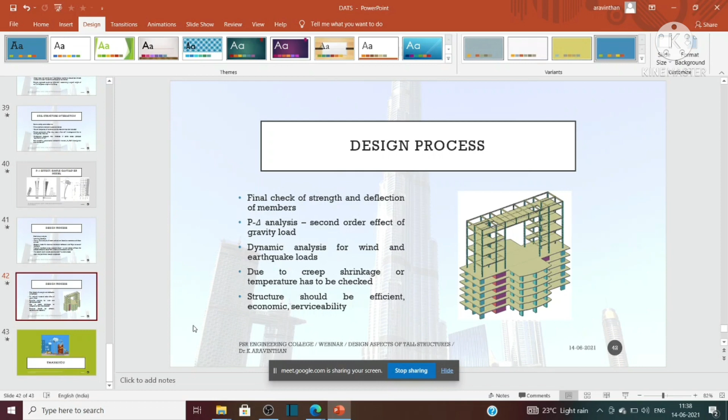A few things remain - foundation settlement, soil structure interaction, P-delta effect, and the design process. These four things I will discuss in the future.

Let me conclude up to this, and I thank all the participants. This amount of time has been spent by the number of participants, and I hope this will be useful for your careers - at whatever level of your career, you will be getting certain information. I hope it is useful, and that the 1.5 hours has been academically useful. I thank the members, the management team, and the organizers who have worked day and night for this conference, and I thank everyone for giving me this opportunity. Thank you.

Thank you, sir. Yes, if you have any questions, one or two we can have.

Sir, what are the load combinations to be used? What are the exact load combinations to be used for tall structure?

This is Mishra querying. Okay, so you need to know about the load combinations.